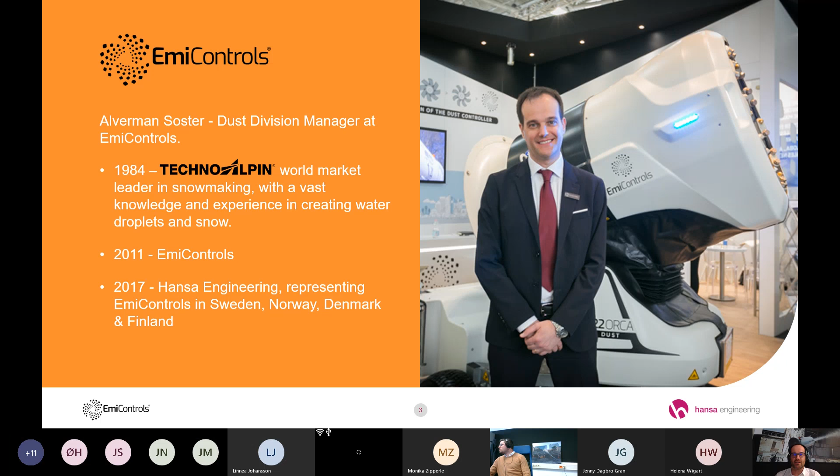In 2017, EmiControls started cooperation with Hansa Engineering, which is our partner and distributor for the Scandinavian area, meaning Sweden, Norway, Denmark, and Finland.

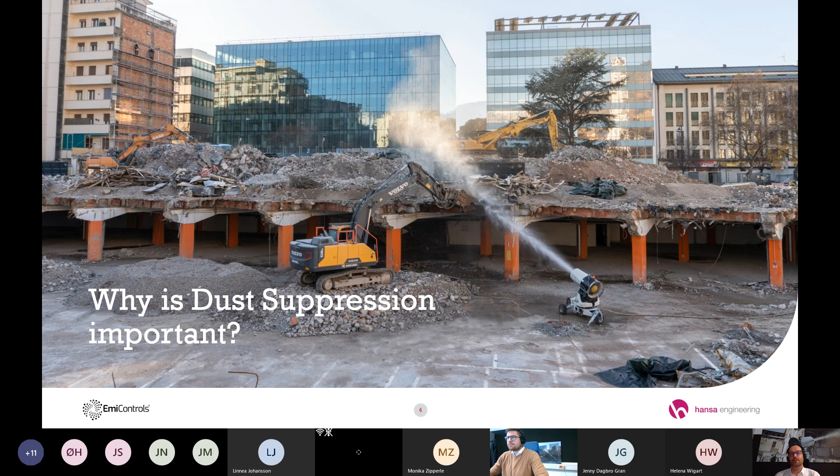So let's start and have a short look at why dust suppression is important. There are several points about the importance of dust abatement. First of all, health and safety: it has been recognized for decades that dust abatement is very important, especially for the health of the employees working on the demolition site, in the quarry or mining. Dust, especially silica dust or maybe asbestos, is responsible for many respiratory problems, and also, importantly, lung cancer.

Risk of accident. For example, in a very big quarry with a big dumper or big shovel, the dust is so heavy that from time to time there are really big accidents between the trucks moving material in the quarries. This dust is also a problem for those who live close to those areas, like the quarries, demolition or recycling areas. So we also want to avoid any conflict with the neighbors living close to those facilities.

Dust is also a very big problem in terms of the cost of maintenance and cleaning of the equipment and machines operating, for example the trucks, the dumpers, the hoppers, the belts of the conveyors. And of course, in many countries there are now a lot of restrictions and laws regulating the allowable dust in the air that we breathe. Recently, in the United States, from I guess last September or October, they cut by 50% the airborne dust allowed in the air.

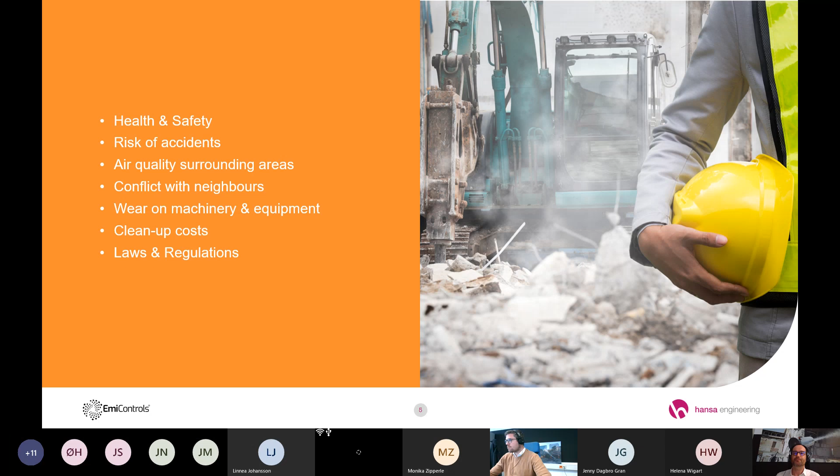So let's see what the technology behind efficient dust suppression is. It's very well known that small droplets are the best way to collide and combine with the dust in order to bring it to the ground and keep it there. The ground will also remain a little bit moister, so the dust will remain there. The main methods available on the market to atomize water or fluid are pressure, compressed air, centrifugal systems, electrostatic systems, and even ultrasonic, like the aerosol machine.

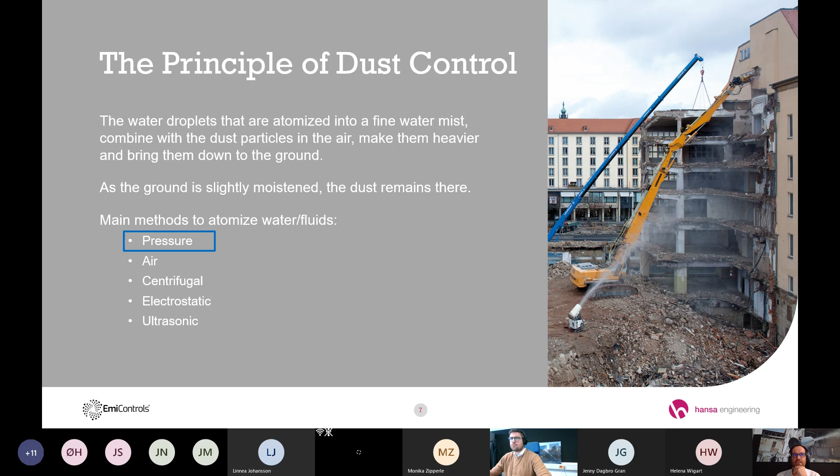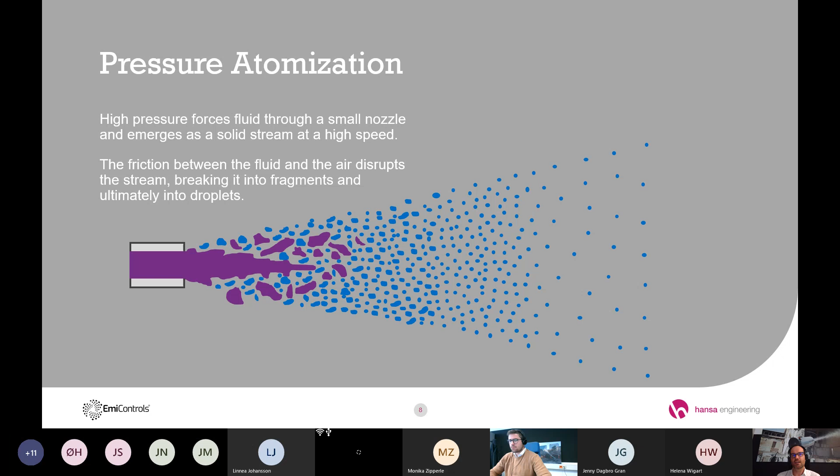After the long experience we have had in the market, we decided the only way for our application to have very good efficiency in the atomization of water is to use high pressure. High pressure means that the fluid, like the water we use, is forced through very small nozzles. After the nozzles, it emerges as a stream at very high speed, because with high pressure in the nozzles and 0 bar outside in the atmosphere, this very high dissipation of energy creates fragmentation of the stream, and further from the nozzle it becomes small droplets.

This picture is very significant in my opinion, because you can see that the water stream is totally fragmented into very, very small droplets. So the main source of energy is the fluid pressure itself, which is converted into momentum as the fluid exits from the nozzles.

Which are the factors that are affecting this spray? Of course, the orifice diameter. The smaller the orifice, the higher the fragmentation that we have. Of course, also the atmosphere, the environment where we spray. I mean, if there is a windy condition, if there is humidity, relative humidity, the temperature. And also the relative velocity between the fluid, the stream of fluid that we have, and the air that is in the atmosphere.

Why do we choose to use just pressure atomization for dust suppression? There are two main points. The first one is the cost, because just to raise the pressure of water is very simple, and the cost is very low. We can raise up to maybe 100 bar with a standard piston pump, and the cost is not so high. And also the efficiency.

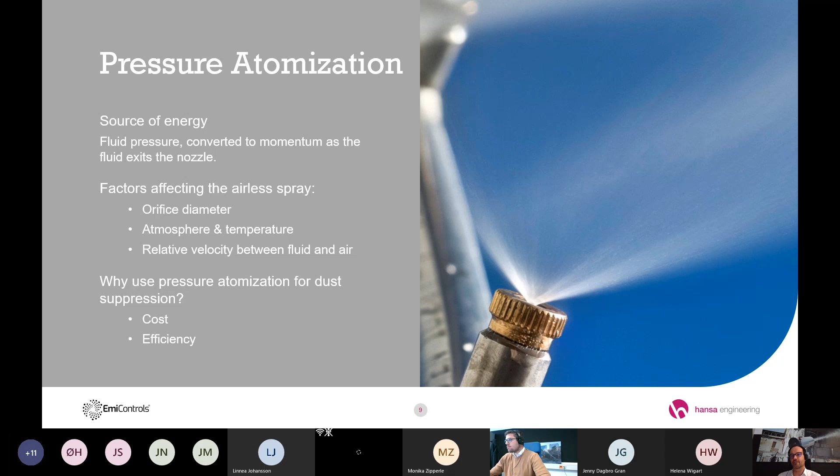Let's talk about also why we choose pressure atomization. There is a strict correlation also between the droplet size and the dimension of the particle of dust that we want to abate. Here, for example, you can see in this drawing, a big droplet of water is not able to catch small particles of dust. The particle of dust will slip around the drop of water. On the opposite side, the correct dimension of the droplet will collide with the same dimension of dust. So this is really, really important.

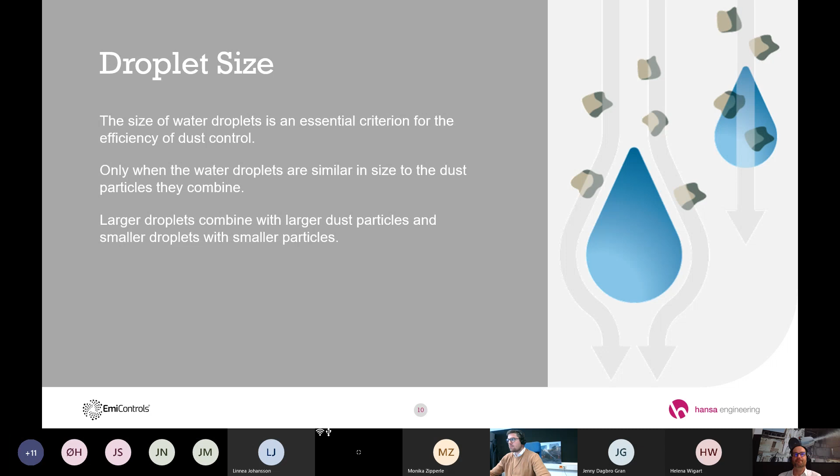And so if we consider our experience, all the dust generating points have quite a large spectrum of particle dimensions. It means that we can measure between, let me say, 10 microns up to 100, 200 microns, the dimensions of the dust that we want to abate. So we have to be able, with our equipment, to create the same droplet size. It means that we have to create between 10 microns up to maybe 500 microns droplet size. That's the usual dimension for dust suppression.

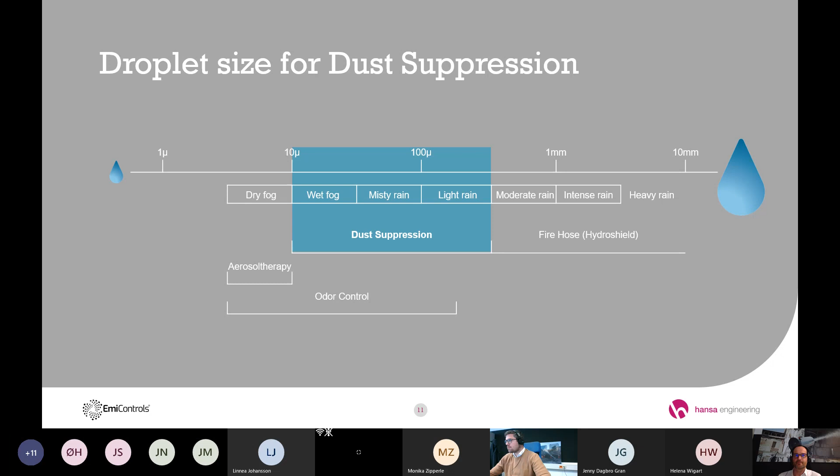Another important aspect of the dimension of the droplet: if, for example, you consider the water trucks that are wetting the ground on the streets, on the roads, or maybe also in the quarries, they are just only spraying water from a back down bar, or maybe people are also using standard big heavy sprinklers that are used in irrigation, or maybe also in the soccer field to keep the soccer field wet. This is okay to put a lot of water on the ground, but a lot of water means ponds, means also that there is a huge consumption of water for nothing.

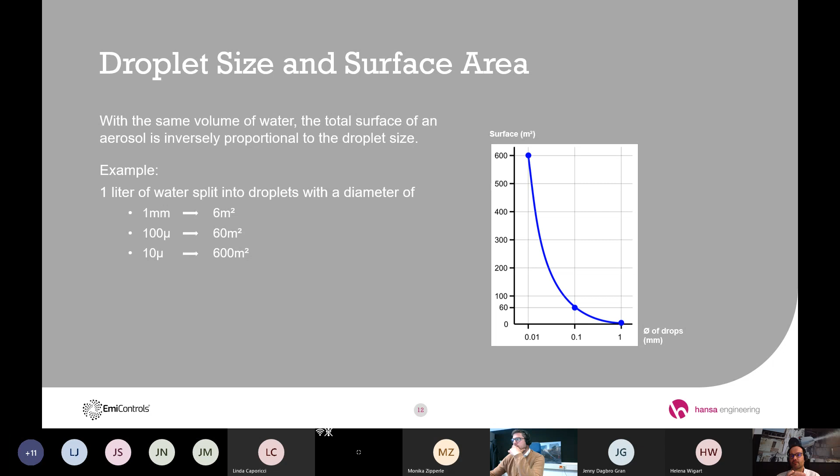If we consider using 1 liter of water and we are able to spread this liter of water in small droplets, if we consider 1 millimeter in diameter, we can cover around 6 square meters. But if we can downgrade the droplet size of the 1 liter to 10 microns, we can cover 600 square meters. So it's very easy to understand that if we want to cover a very huge surface with droplets, the most important way is just to divide into small droplets, because we can save a lot of water.

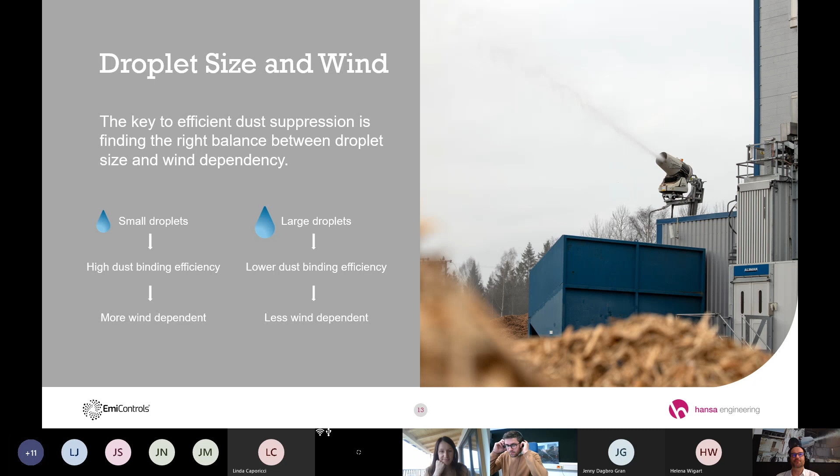So it's not easy to find the correct balance between the dimension of water, the position of the equipment, and the water consumption. So let's see how we can keep the balance, okay? The full control of water mist is made by adjusting the nozzles. I mean, at the beginning, if you remember, we talked about the orifice of the nozzle. So the orifice plays a very important role in the droplet dimension. So the choice of the nozzles, the possibility to change the water flow, and also the possibility to change the spraying distance.

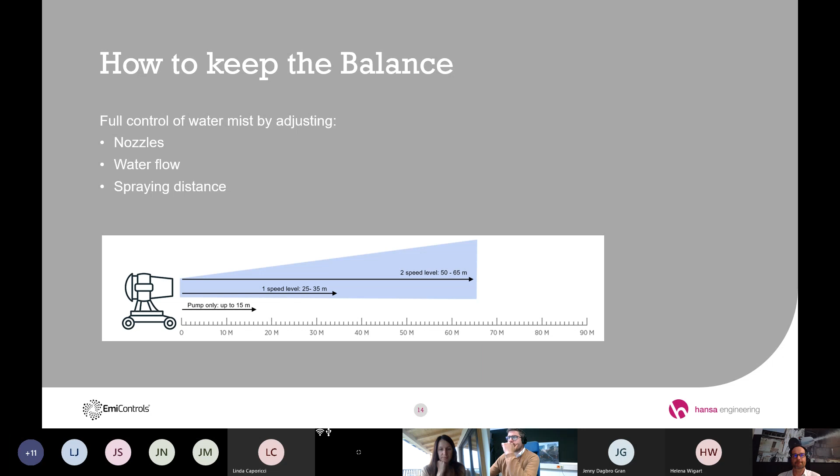So let's talk about the technology, about the efficient dust suppression. We spoke about the nozzle. Okay, in EmiControls, we develop in our machine a special nozzle head that is inside of the turbine, of the cone of the turbine.

Why this one? Because consider that from the engine, from the turbine itself, from the propeller, we have a laminar flow. And this means that we want to have the possibility to give to the droplet the same laminar flow, because we want to manage as much as possible the direction of the plume that we create with our spray stream.

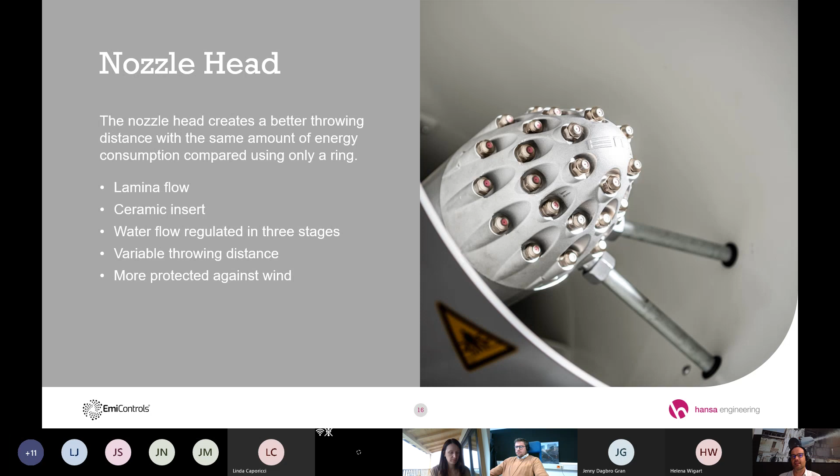And of course, why did we choose to have the head internally in the turbine? Because in this way, we give immediately the energy that is coming from the impeller to the droplet. So the droplets coming out from the turbine have, let me say, less dependence on the wind, the lateral wind.

Of course, if we have a very huge machine like the V22, that is the biggest that we manufacture, we have a very high throwing distance. We reach up to maybe 80, 90 meters from the machine. This means that we want to cover a very huge area, but also a very huge volume of air. So we have also increased the machine with an external ring. Okay.

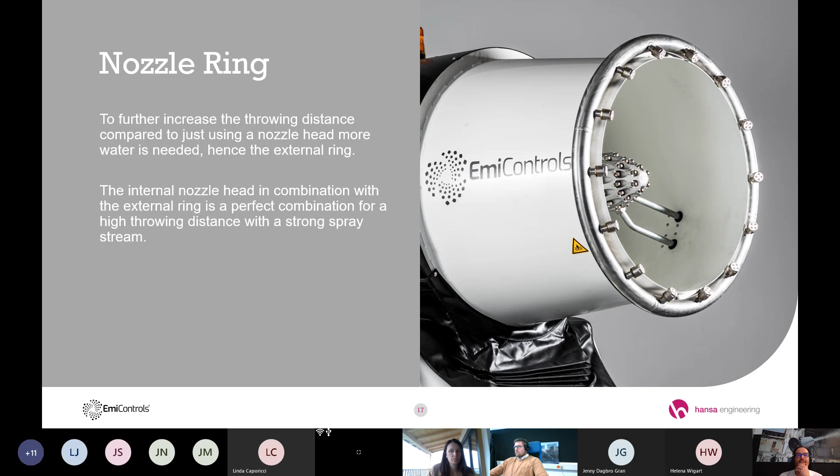Another very important aspect of the equipment that we manufacture is the design of the rotor blades. We started in the company more or less 30 years ago manufacturing turbines for the snow business. And it's very important to use the correct material and also the correct design.

Why the material? Most of the impellers on the market have blades made of plastic. Plastic is okay because it's less expensive, of course, but there are several disadvantages, like, for example, the thermal excursion. If we operate between, let me say, -20 up to +30, you can imagine that the plastic has a very high thermal excursion. So after those cycles of hot and cold, the plastic can become fragile. So it can happen that you have breakage on the impeller itself.

And so we moved slowly to an aluminum cast alloy that is very, very good in efficiency for the laminar flow. It's very resistant. The weight of the blades is very low. So we have a very high efficiency in the rotation of the impeller using less power.

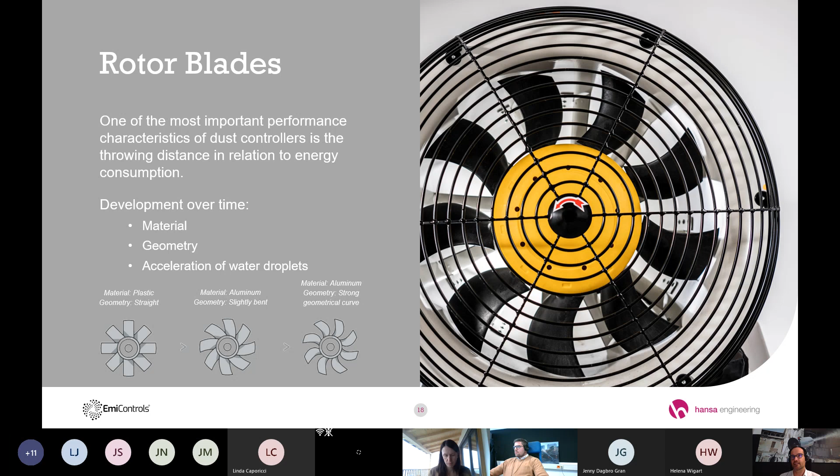After talking about the efficiency of dust abatement and the machine manufactured with the technology, we have to check something about sub-zero conditions. What happens if we have to make dust abatement under 0 Celsius degrees? Several companies have a problem with dust also during the winter time, for example in the Scandinavia area or in Russia, all the areas where there is freezing temperature in winter, they have for sure also dust during the winter.

The solutions available on the market are dust turbines with a heating function, or maybe to use snow guns, or maybe to think about using a hybrid dust turbine.

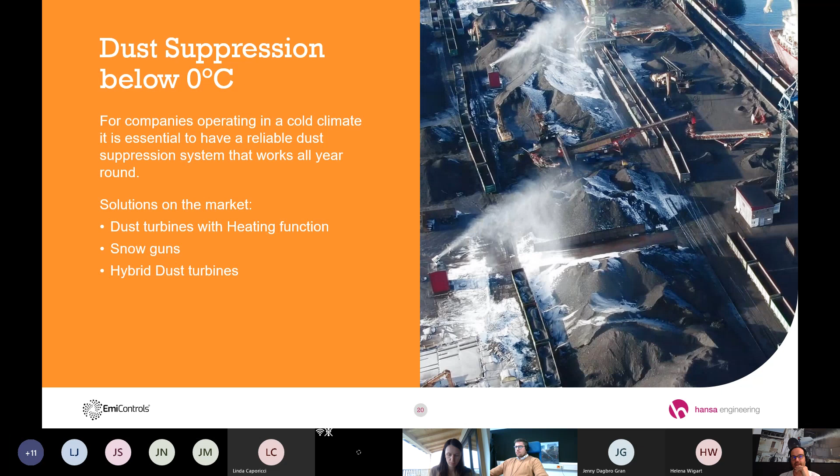Dust turbines with a heating function are just a standard machine where there are some heating strips or heating system just to prevent damages on the machine itself. With this equipment, it's possible to operate till, let me say, -10 Celsius degrees.

If we have to go down below -10, we need an intelligent heating system, because if we are operating at -20, -25, when you switch on the machine it has to be already heated, ready to work. The automatic drainage also has to be very sophisticated, because we have to drain all the water from the nozzle, from the hydraulic circuit, from the pump, in order to prevent any damage.

At this low temperature, the only way to be able to abate dust is to create a crystal of snow. And the only way to make crystal of snow is to use, together with water, also compressed air.

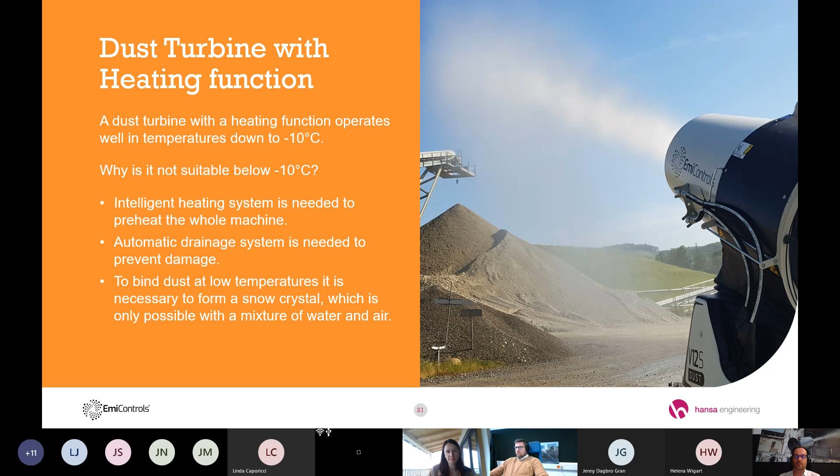So the only way is to think about using a snow gun, which is the one manufactured just to make snow.

But why is it not suitable to use a snow gun to make dust suppression? On the ski slope, we have to produce dry snow, because the skiers want to ski on dry snow. The snow blower is built to maintain the quality of dry snow along a very high spectrum of temperature and relative humidity, and they are able to make the same dry snow between 0 down to -25.

The compressor used to compress air for making the snow in some of the machines is not possible to switch off during the summer period. And those compressors are specifically designed to operate below zero, not up to 20 or 25.

Consider also that the season in the snow business is very short. And on the ski slope, they want to have the possibility to produce as much as possible cubic meters of snow in a very short time.

So the water consumption with the snow blower is very, very high, too high for the dust suppression business. Consider that a standard snow blower in 1 hour, in certain conditions, can produce between 50 to 60 cubic meters of snow.

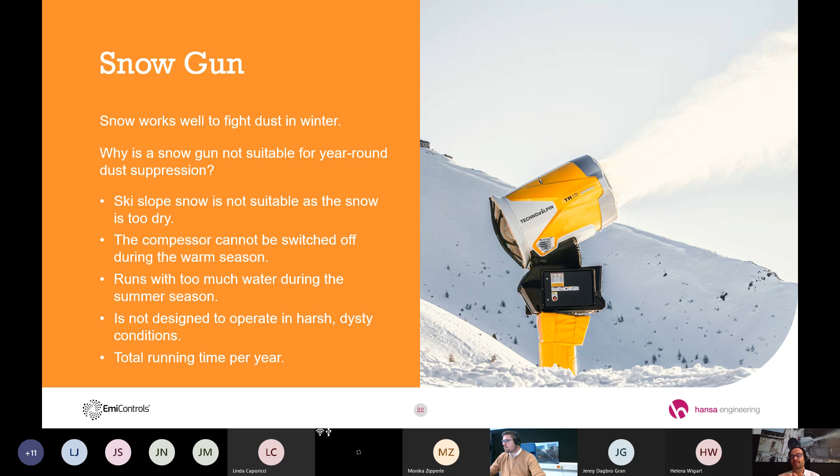Also consider the total running time per year. In maybe 4 years, a snow gun can work for maybe 1,000 hours, something like that, maybe 2,000. And in the dust business, in 4 years, you can have also 15,000 hours. So the components, the mechanics, the construction is totally different.

That's why we decided to design a hybrid dust turbine that is able to operate in the summer period, let me say up to plus 40, even to minus 25 during the freezing period.

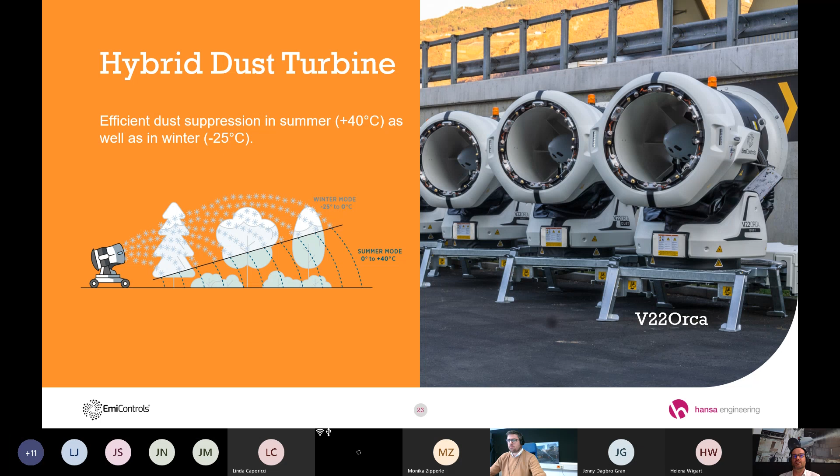This machine, of course, is built for the dust business, so it's very robust, but it also has the same suitable solution for making snow.

I mean that we have the software and the capacity to maintain a heated machine during the freezing period. We also have the possibility to make snow close to 0 degrees down to minus 25, but with the quality of wet snow.

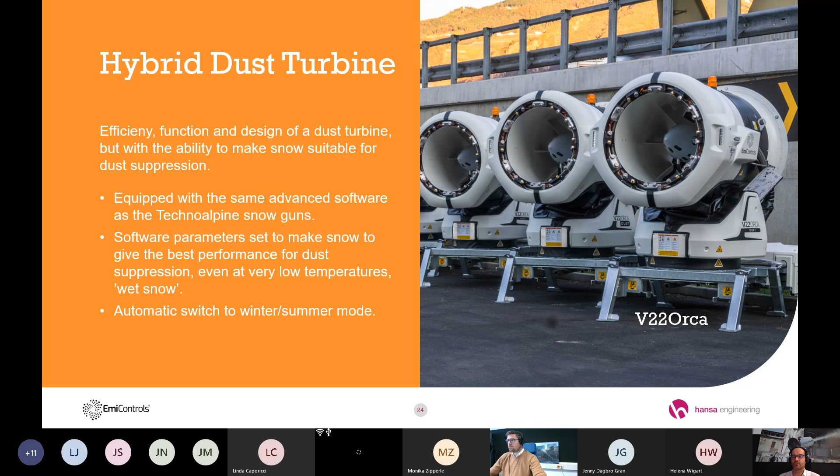That is the one we want to have in order to be able to collect the dust, the airborne dust. And the machine is able to switch automatically between the hot and the cold temperature by itself, switching off the compressor and also the heating system and the automatic drainage.

What is behind the production of snow? We have the nucleator nozzle, a special nozzle with a special insert inside where we mix water together with air. In this way, we create a sort of air bubble covered by water that we call nucleo. This nucleo starts to make the first snowflake.

The quadrijet that are close to the nucleator create the water mist, and the snowflake collects the mist, growing itself. So the snowflake will grow, and due to the throwing distance, we simulate the fact that the snowflake is falling from the sky.

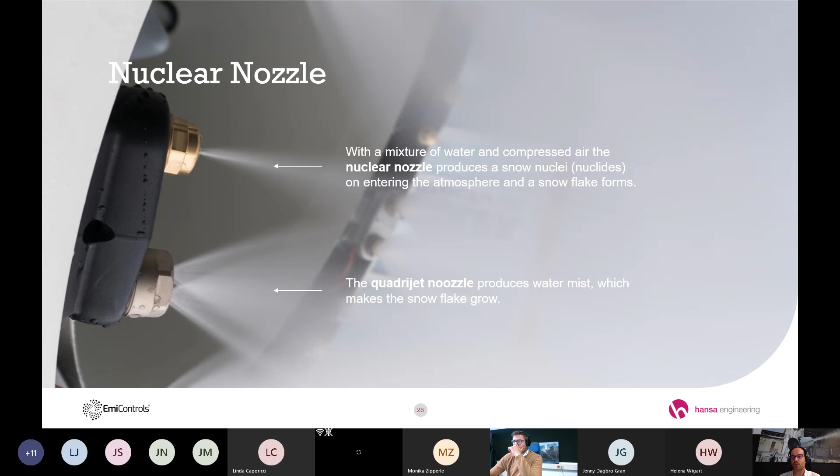Why do we want to use snow? Because snow has a special structure. The density is totally different from ice. Snow is an open structure. It's a solid, but it's an open structure with also humidity.

So it's the only way to collect airborne dust when you are in freezing temperatures, like minus 20 or minus 25. Ice is a solid, so if you don't have the possibility to make snow, and if you spray only water, big droplet water, it's like firing a needle against the dust. It's not possible to collect the dust.

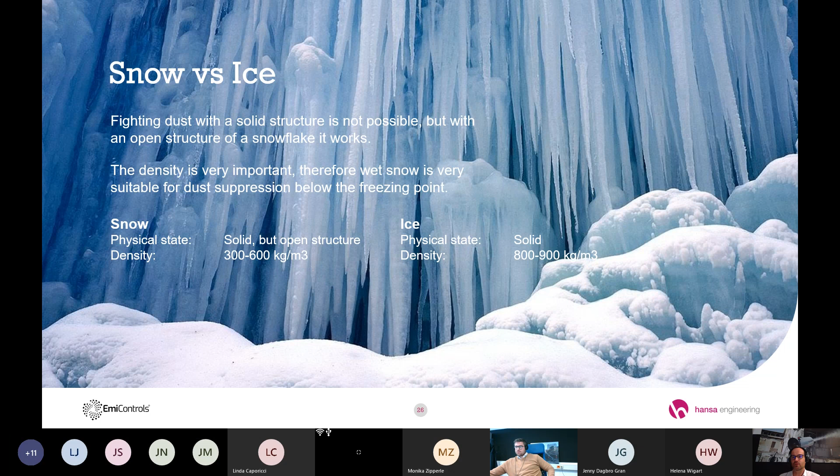It's possible to create a snow crystal only with the snow gun and with the hybrid machine. But the only machine suitable for those conditions, also for hard conditions, is the hybrid machine.

With the hybrid machine we have the possibility to switch off the compressor automatically. It's very important to have multiple spray options and flow. And of course, the hybrid machine, fully designed for dust abatement, we can also manage the flow to have a very low flow for dust abatement.

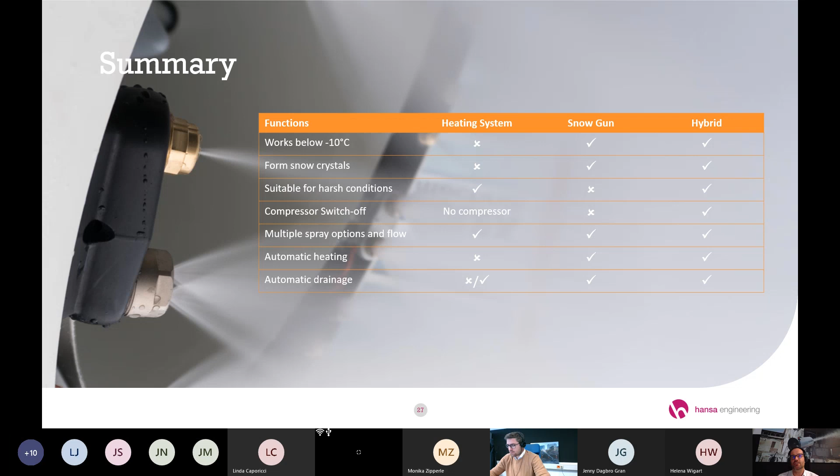The automatic heating is present only on the snow gun and on the hybrid, and also the automatic drainage, which is very, very important.

Here we have an example. During the presentation, you probably saw some pictures with some port. Those are coming from applications we have done in Russia. Here we have, for example, the port of Nakhodka, very far east, close to Vladivostok. There are several huge coal terminals over there with trains downloading the coal, stacker reclaimers.

We have several applications like this one, where the problem was to create snow to collect the airborne dust, but also to cover the stockpile of coal with a thin film of snow, just to avoid that the wind blowing that area can blow the dust out over the city.

We have fixed installations with several machines that we can manage with our software from the remote office of the terminal. And here, in cooperation with our partner in Russia, they built this special wagon that is moving on the railway, where also the stacker reclaimer is moving.

So this system contains two big water tanks, because we have two blowers, two big water tanks, 60 cubic meters each, and the whole wagon is heated for operating down to minus 30 Celsius degrees. This is a very interesting project that we have working in Russia.

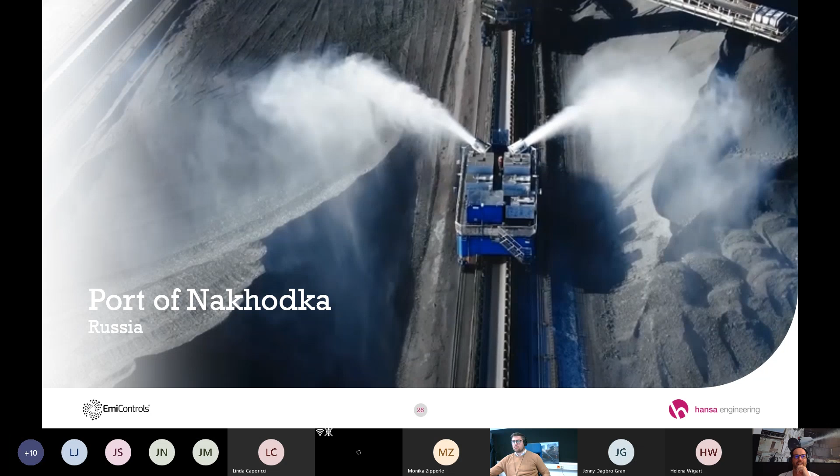Okay, from my side, the presentation is finished. Now I'm available for some questions and answers that maybe someone has for me.

Let me see here if we have any questions.

Here, Alverman: if we have particles on site in the water, for instance, can you take water from a dam, how is that sorted? Yes, sure, because our equipment is equipped with a special filter inside the machine, because very often the end user doesn't have the possibility to supply potable, fresh water to the system. So we can use water coming from a reservoir, a tank, a dam, because we have stainless steel filters inside that are very easy to clean and accessible.

On our installation, like the one you saw in the Port of Nakhodka, we have also created a pumping station with a filter station, so it's not a problem. But for sure, the machine, also the standalone machine, can operate with industrial water or water pumped from the ground.